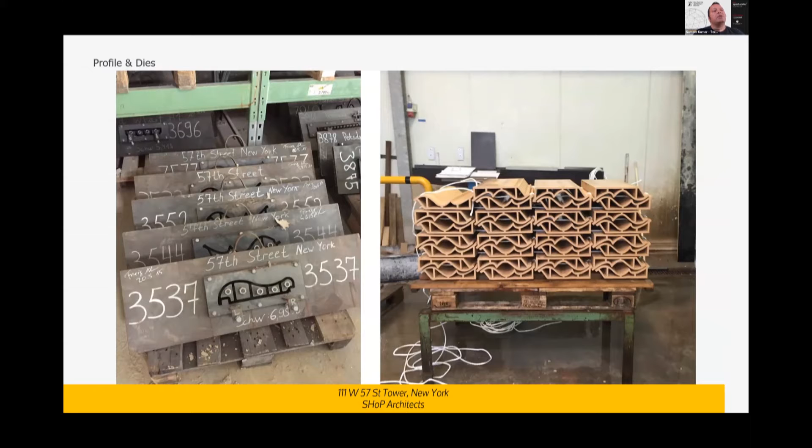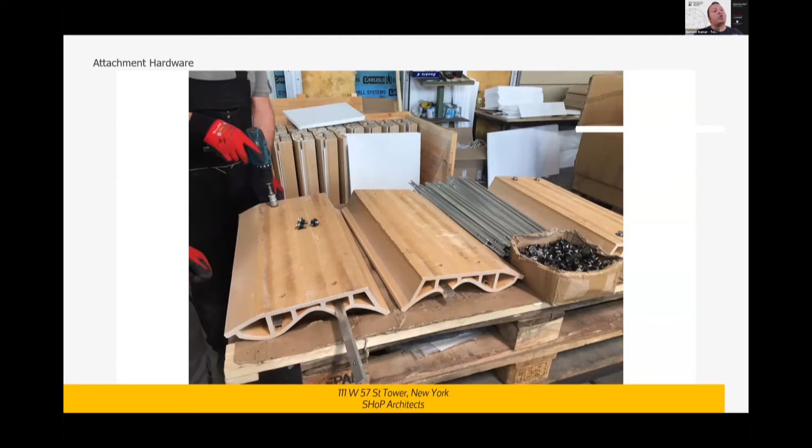So the most common way of using terracotta in architecture today is through an extrusion process. You can see the dies on one side, you can see how extrusions look on the other side. And for the 57th Street project, we took these terracotta pieces and then we incorporated other hardware within it to enable it to be mounted to aluminum facade panels.

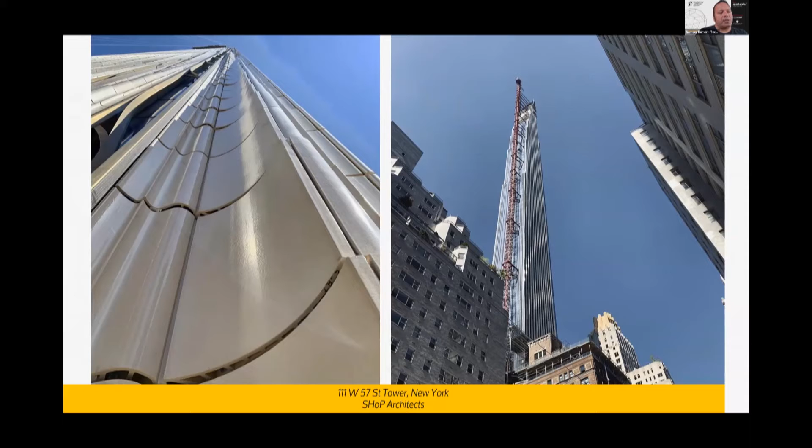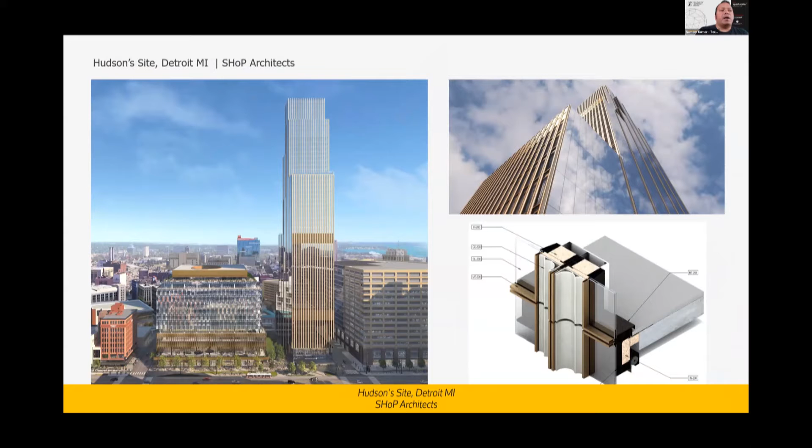And that is what basically brought us to being able to put terracotta as high up as 1,400 feet, which is the height of this tower, one of the tallest towers with terracotta on it. Similarly, the Detroit project is still under construction, so the images you see here are renderings. They also use extruded terracotta as a part of the facade.

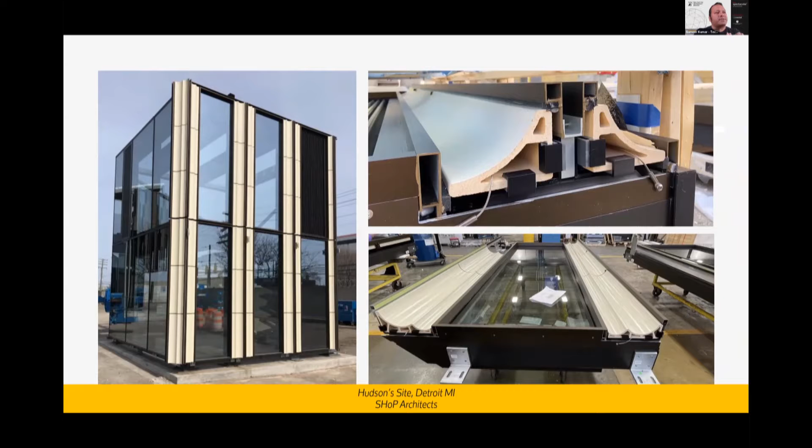And these are some images of the mock-up and some images from the fabrication shop. You can see on the upper right corner the extruded terracotta piece and the hardware that goes into holding it in place. So this is where we start, right? We as architects, as facade designers, were very familiar with terracotta as a material.

In 2017, we were invited by Fuori Salone at Milan Design Week to participate in this significant exhibition that they conduct during the design week. This was a sort of combination: SHoP invited NBK to participate because we were working a lot with terracotta and we wanted to try something interesting and new with NBK.

We offered to NBK that we would like to find a new expression of terracotta while using their existing methods of fabrication, without changing anything. We'd still like to find a new appearance of terracotta. And they got excited. Interni is the name of the company that organizes Fuori Salone.

A little bit about this event: they have a long history of inviting very prominent architectural and design practices to come and produce temporary installations, something that stands up for 2 or 3 weeks, and hundreds of thousands of people come and view it. So this is really just meant for display of your design capability or production capability. It is very much an exhibition piece.

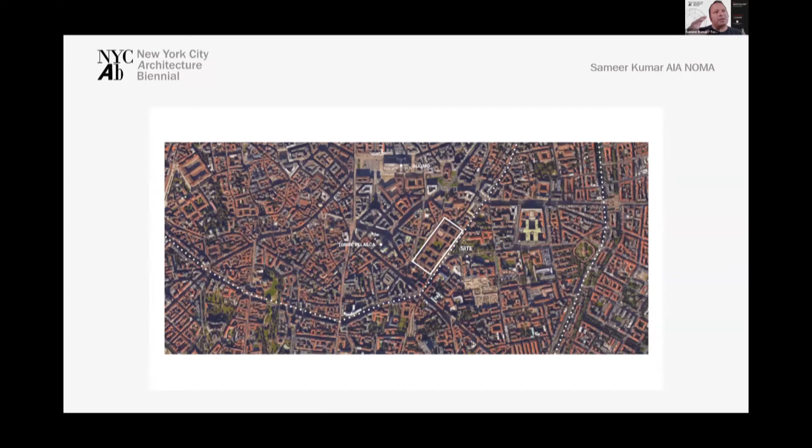And the location is right in the heart of Milan, in the State University, the Statale building. This building itself, interestingly, is extremely ornamental, all of it decorated with terracotta. And so it set up a point of departure for us. On one hand, we have this building and its gorgeous ornamentation. And on the other hand, we have this extremely modern extruded terracotta expression that we're also familiar with.

How do we bridge this gap between something that was highly ornate and archaic and something that is very industrialized and very repetitive and therefore, in a way, slightly banal? Since we were limited by the process of extruding it, our investigation started with the idea of: what do we do with an extrusion that has not yet been done before?

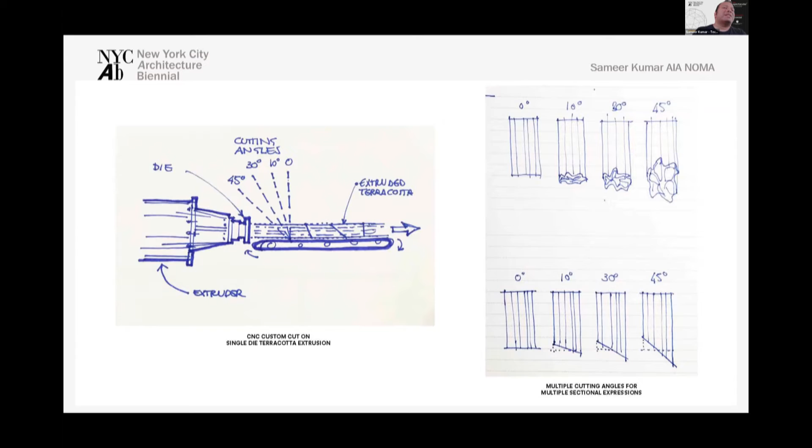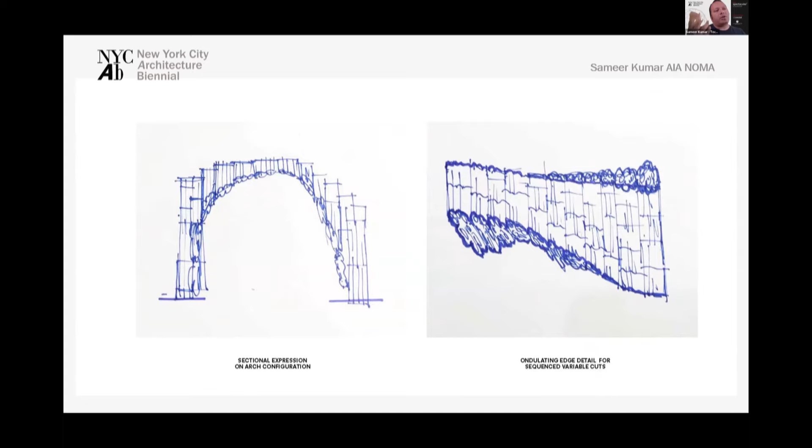One of the obvious things that we happened upon was that all extruded terracotta is used where the cross section is concealed. You see the face of the terracotta, while we decided we wanted to explore exposing the cross section of the piece. We started thinking about structures where you would be able to see underneath the terracotta and look at its cross section. And we were of course driven by ideas rooted in the history of arches and highly ornamented spaces.

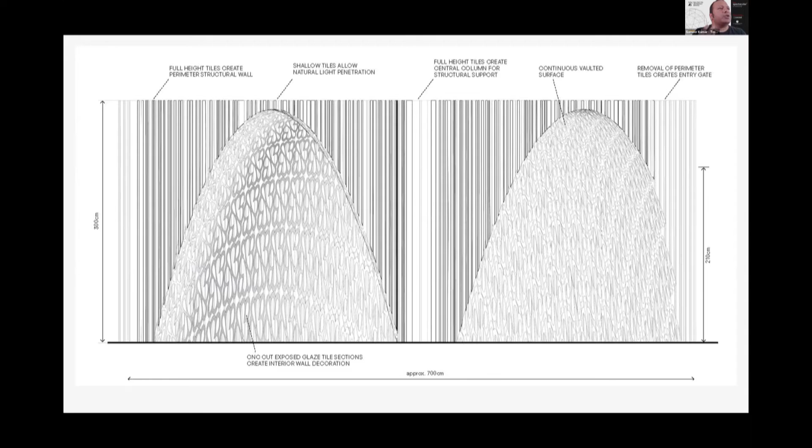And so these were our early studies, which started out as designing a cave, something that you would enter into. And then eventually, for various reasons, we ended up flipping it upside down and designing something that was actually facing upward, that you witness from the outside.

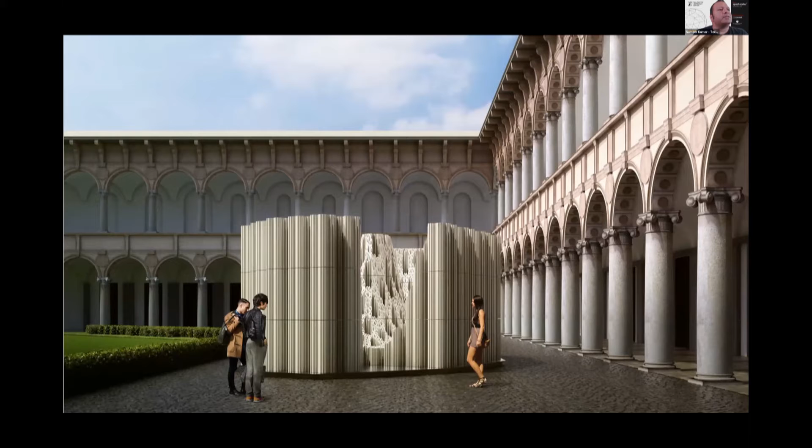Interesting, and this was our early expression rendering that we did, which internally sort of bought it based on this rendering. They were like, yeah, this looks good. NBK were excited. And we started the process of investigating how we were going to arrange this terracotta to do what we wanted it to do.

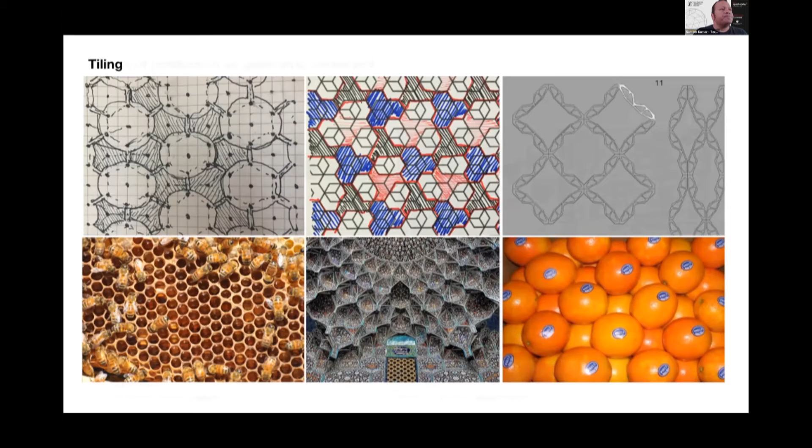And obviously, we knew that we had only one tile that we could make. It couldn't be multiple tiles, and we had to find a way of tiling it. And we were also limited by the method of production. There are two ways that industrialized production of terracotta happens. There are two ways of firing it.

One is the box kiln, which is the more sort of traditional way, which is to load up a room or a closed volume, stack material inside it, close it, and then turn on the fire, which usually is kind of time consuming because you have to put in time to stack everything, and then you close it, and then you turn it on. It takes 7 to 8 hours for it to reach the temperature. Then there's a hold time. Then you have to allow it to cool. Then you open it and you unload it.

So one of the innovations that companies like NBK have brought to architectural terracotta is that they have created these flat kilns. These are roller kilns where material enters from one side, and it's a very, very long kiln, about 700 meters or so. And the material moves through it, and it gets fired. So there is a kiln that is very long, and you constantly feed material from one side and you take it out on the other side, and it's about a 2.5 hour cycle, and the material comes out fired.

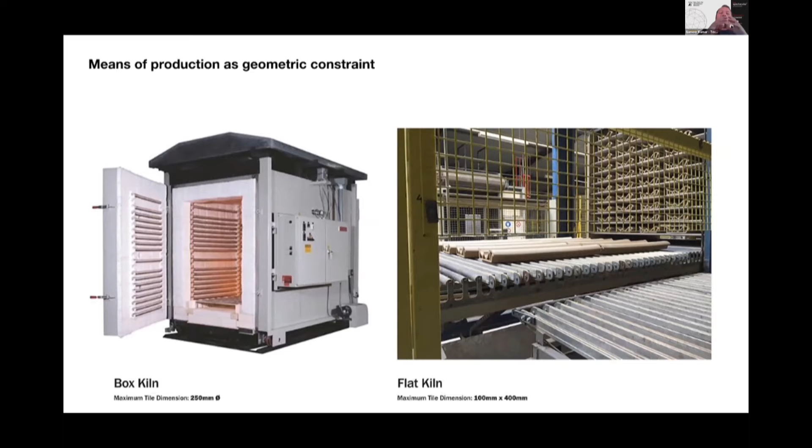So you never turn off this thing, never turn it on. It is constantly on, and you keep just feeding it with material. But there are limitations of size that come from it. And so working with that, we were given this limitation, 400 millimeters by 100.

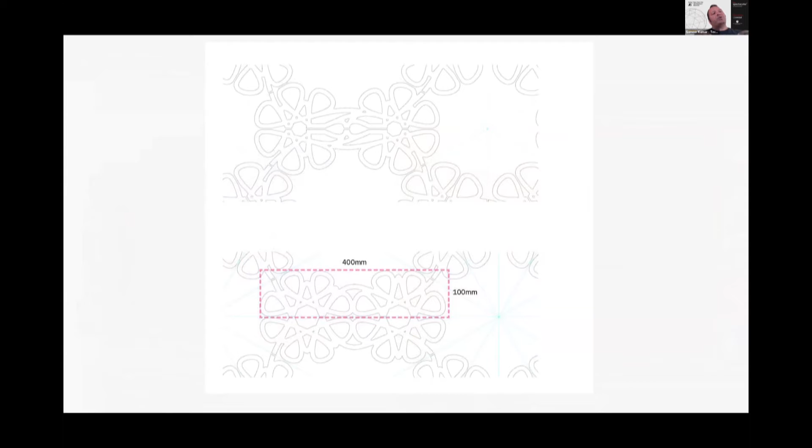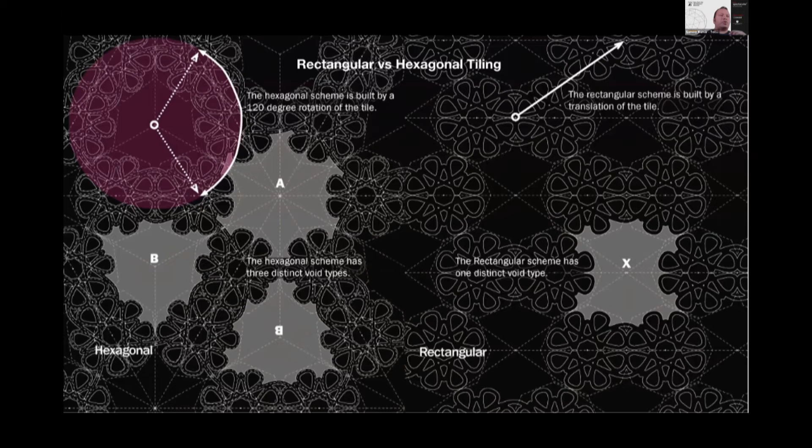So we tried to come up with a tile shape which had an interesting pattern in the cross section, which could then be tiled together to result in something that was at the same time very strong, but also very ornate. So you can see how as we were studying the tiling, we realized that we had ended up with a tile that could be combined in two different ways, a hexagonal arrangement or a rectangular arrangement, and both of them resulted in different types of visual patterns.

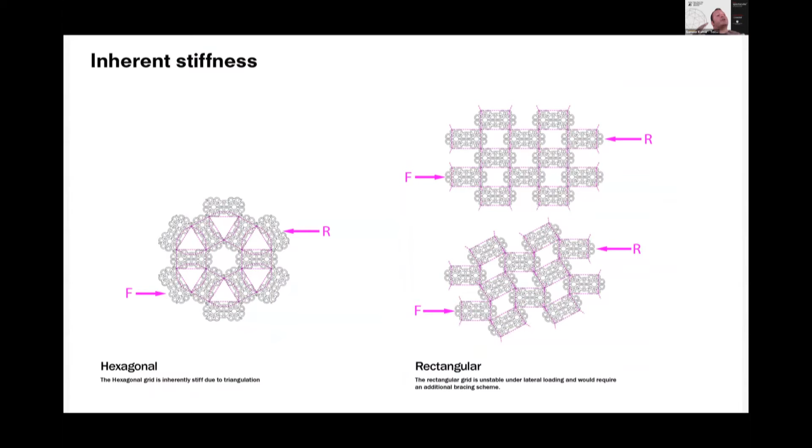And we also realized that there were some real benefits to going with one versus another. So a rectangular arrangement would give us a much finer effective resolution, but on the other hand, there was an inherent strength in hexagonal because it was made of triangles, so we chose to move away from a rectangular arrangement so that we would end up with a much stronger structure. And so the whole question of resolution, because we had to live with it for strength reasons, we decided that we were going to try and overcome this through creating a complex surface at the cut level.

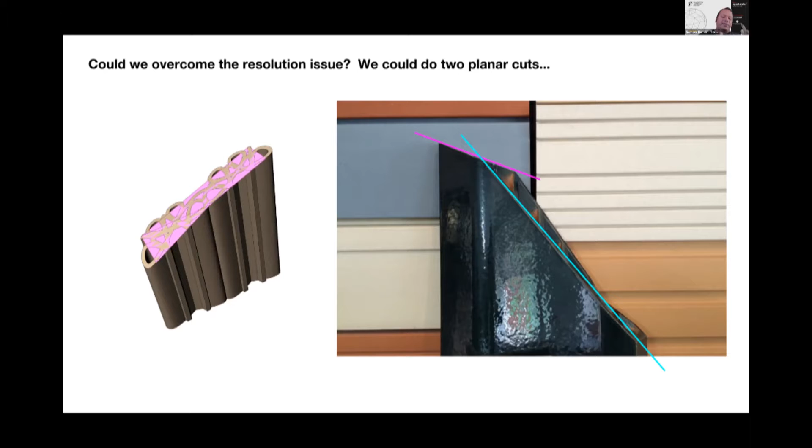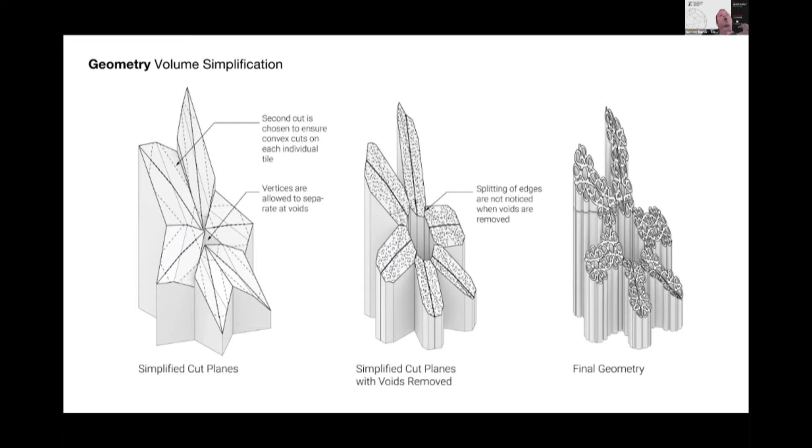So we said, what if we cut each tile 2 times to create a resulting three-dimensional surface? And all of this was happening through a three-dimensional parametric model, and we were able to overcome the question of resolution by writing this really complex script that would ensure that in the cut form, the tiles would seem that they were all matching and result in a three-dimensional geometry.

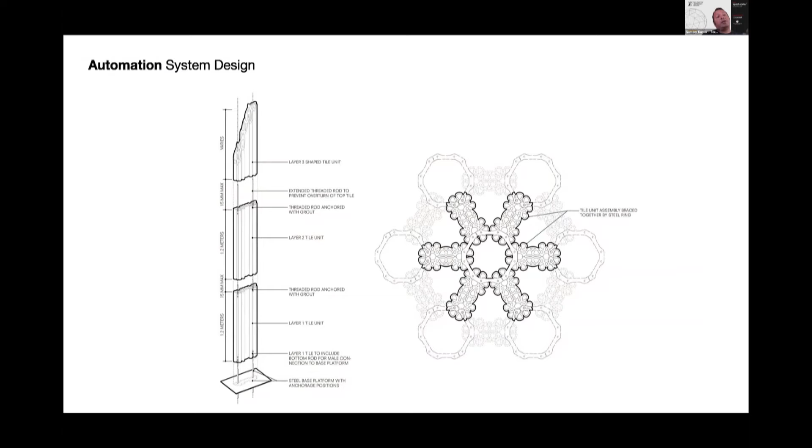And we knew that NBK basically had this one saw, which was a CNC saw, but it had very limited possibilities. It was not like a 5-axis saw; it was just a 2-axis saw. And so, working with that, we brought all of that into our model. We started developing this idea of how we're going to hold it all together. And as the design evolved, it basically started looking something like this, where we were going to have these tiles that are held together by these hoops, these stainless steel rings.

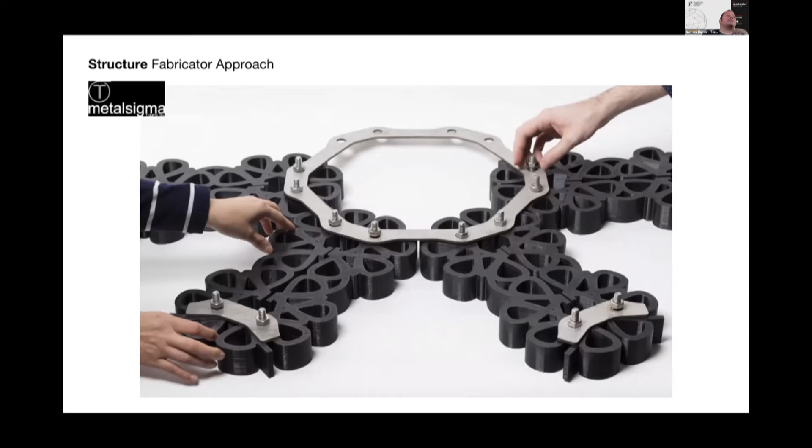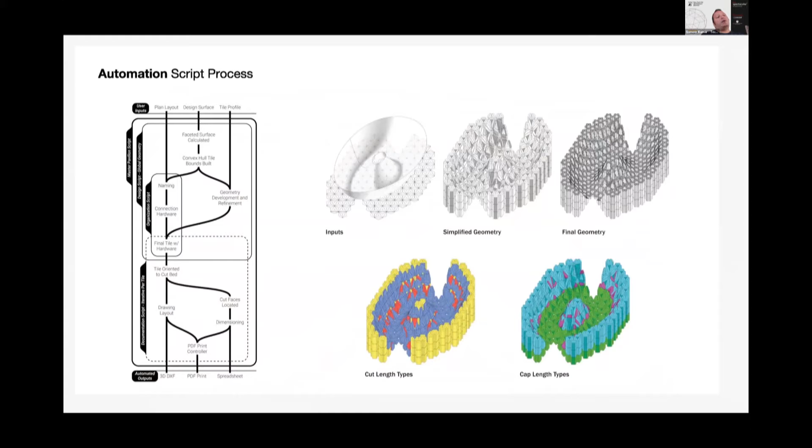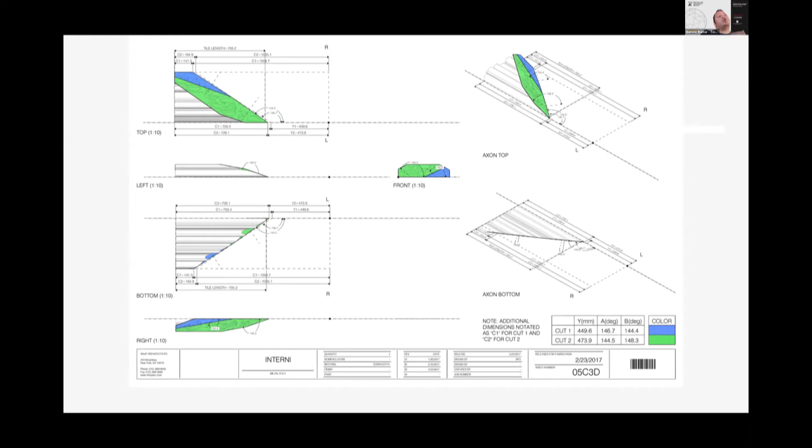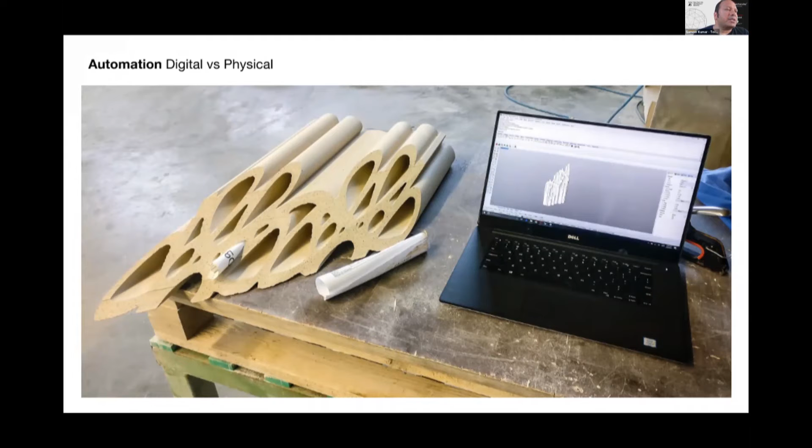These are all 3D prints and prototyping that was happening in the office at the same time. And so with all of this knowledge, we were able to feed it all into an automated script where we were able to generate fabrication drawings straight out of Rhino for NBK, for the fabricators. And we had to really understand what kind of information they needed to be able to correctly register and align these pieces. And that sort of became a critical point of interaction between the two teams, the fabrication team and the architecture team. And so they were able to actually produce all of this.

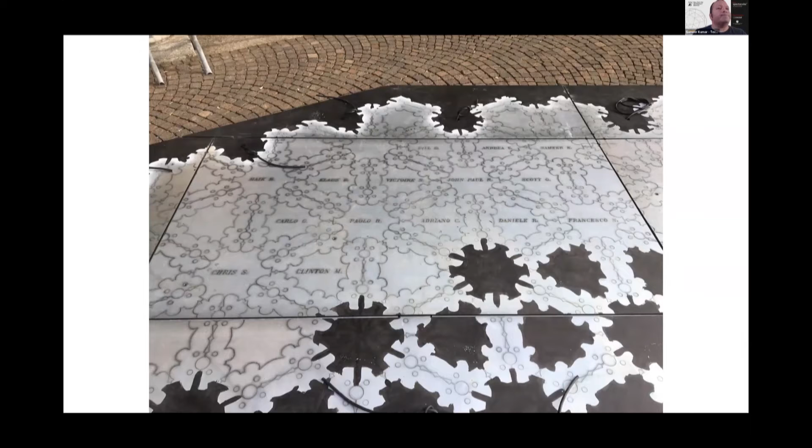On the other hand, in Milan, the installation began, and we had to create this platform where the whole thing would stand. We had to distribute the load to not damage the paving underneath. This was an extremely heavy installation. But at the same time, we also needed a way to transfer the geometry to the site. And this base became the vehicle for that. So we were able to do laser etching on the base where the whole thing will be built, and that would become the main geometric control for the entire structure.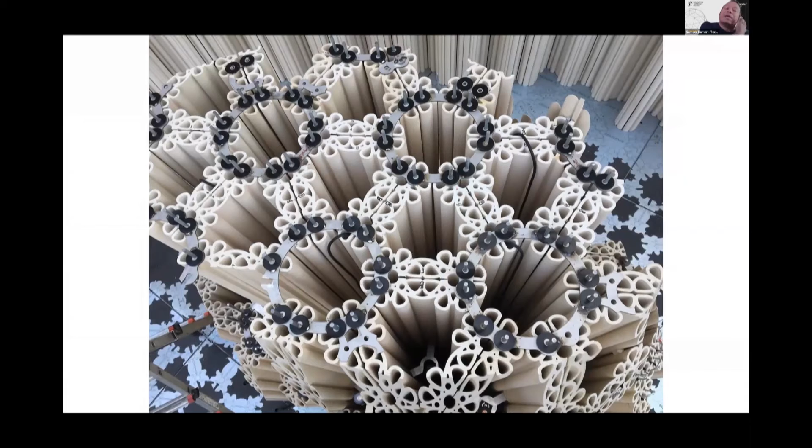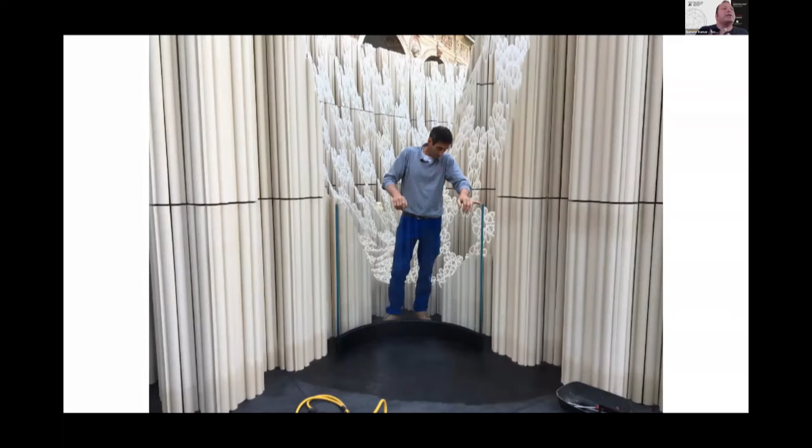And so, the pieces arrived on site with individual sort of birth certificates so that you could identify which piece went where. And then the installation started, and we had lighting that was donated by a lighting company, which was incorporated in certain parts of it. And this thing basically kept on developing. And under 2 weeks, it was fully installed with a lot of hard work. And finally, this curved glass guardrail was put in. And this was a small crew, a crew of masons, actually. These are all people who were used to working in brick, and they were doing this. And this was the resultant.

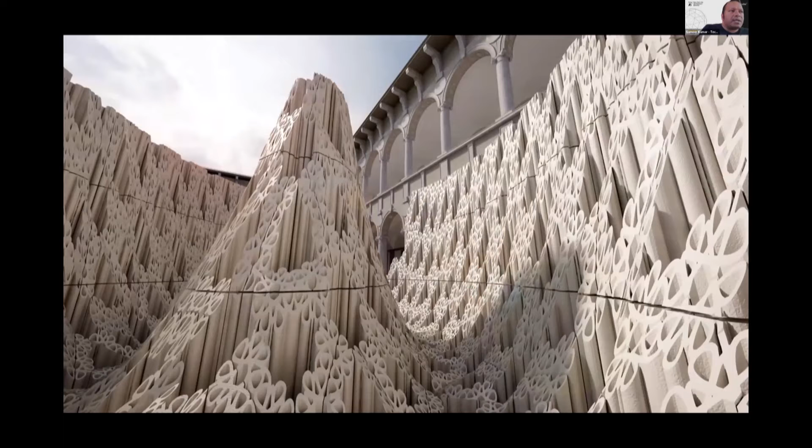And it was very well received. We thought that we were successful in showcasing terracotta, extruded terracotta specifically, in a way that was somewhat surprising and extremely pleasant to the eye. And we thought that it did a good job at finding ornament back in terracotta, even through the extrusion process.

So this was a great experience for us, because in a very, very short amount of time, the entire thing from design to construction was less than 3 months. Everyone worked under a tremendous amount of pressure. And that was one of the reasons why we started out with this upside down as a cave, but ended up with it being, because of the way these pieces were bundled together, there wasn't an inherent structural logic to them for it to be able to stand.

So the next opportunity we got to work in this research capacity was in the architectural ceramics assemblies workshop organized by Boston Valley and Buffalo University in New York. And this time we set out to produce a truly structural tile in terracotta. So, at this point, it was really important for us that we were able to solve the problem of spanning space with just terracotta and no other material.

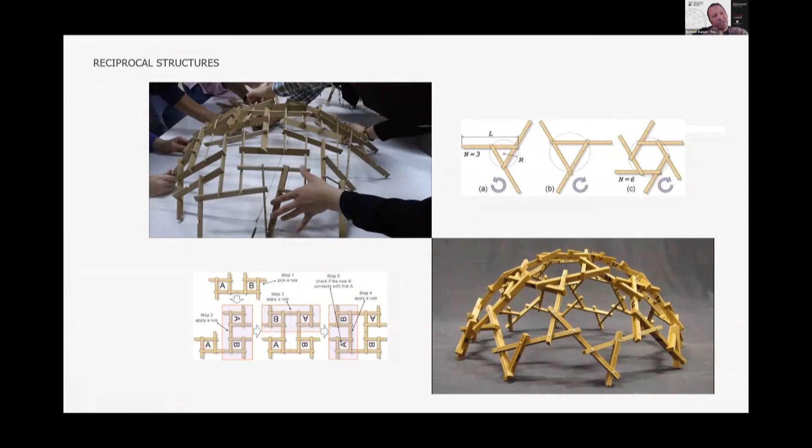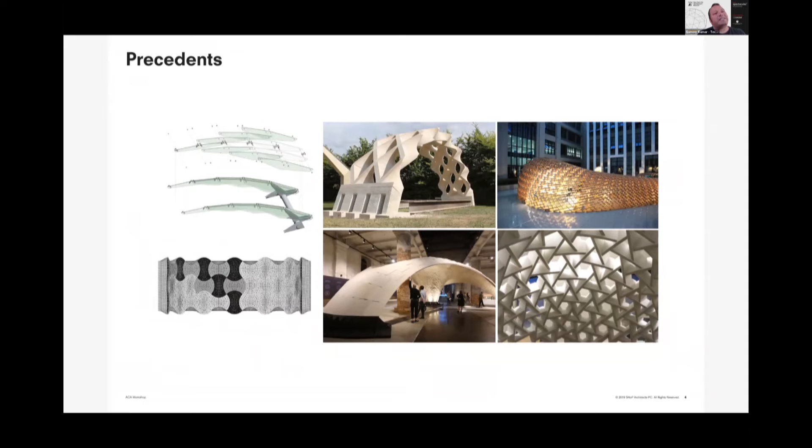So, with that in mind, we started looking at ways of using individual pieces to bridge across, to create spans. And we very quickly honed in on this idea of reciprocal beam action and reciprocal structures where you basically relied on interlocking pieces and their inherent stiffness to maintain geometry. And this is a method that has been used many times in many applications in the past, where there is a stagger in the arrangement and that stagger enables a stiffness to develop.

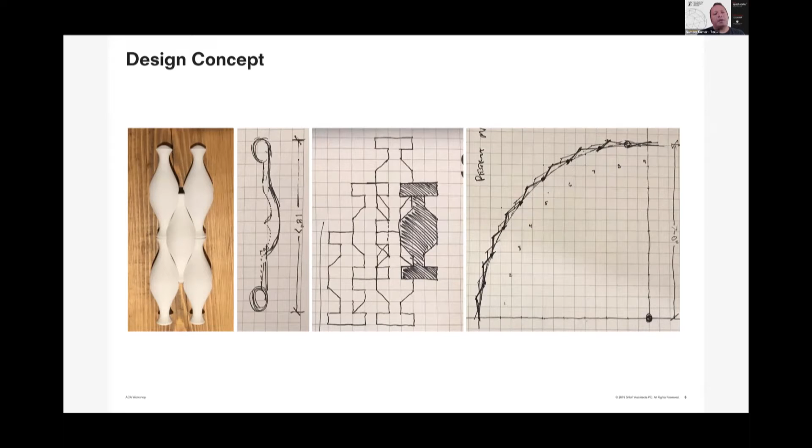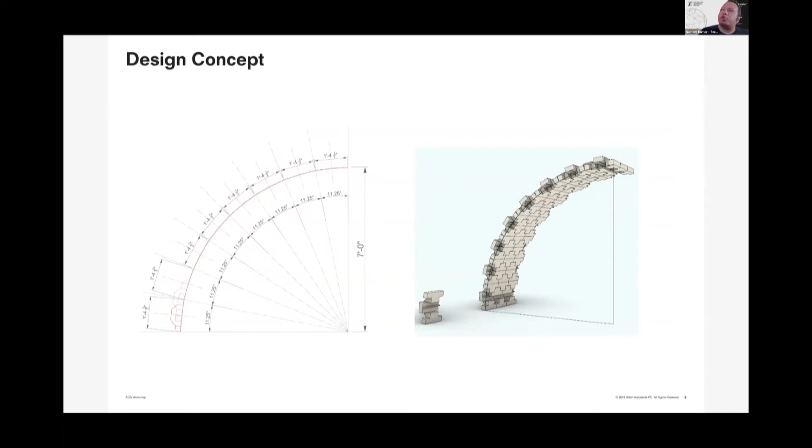So using that idea, we started developing some ideas of a repetitive tile that would be able to interlock in a staggered manner and bring a lot of structural stiffness to it. And so, these are all early studies. It was a 3-dimensional tiling exercise, but it was also an exercise in finding a shape that could be produced in terracotta, which was another whole challenge.

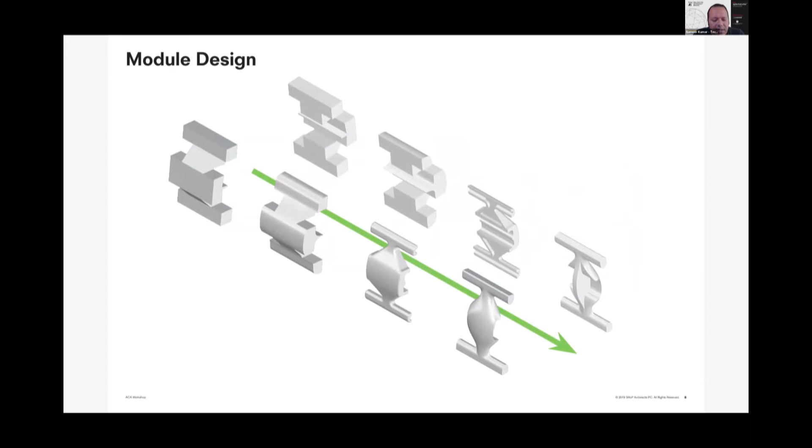So, there is the idea of the 3D tiling, and then there is the idea of a shape that is visually appealing, but also producible. And so that was the journey of coming to a shape that fulfills all of these ideas. And we started taking this forward. We 3D printed a lot of these shapes in-house, and then we started tiling them together.

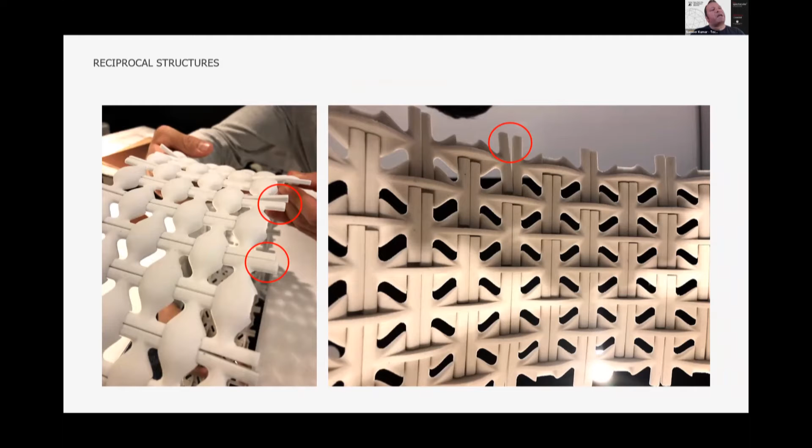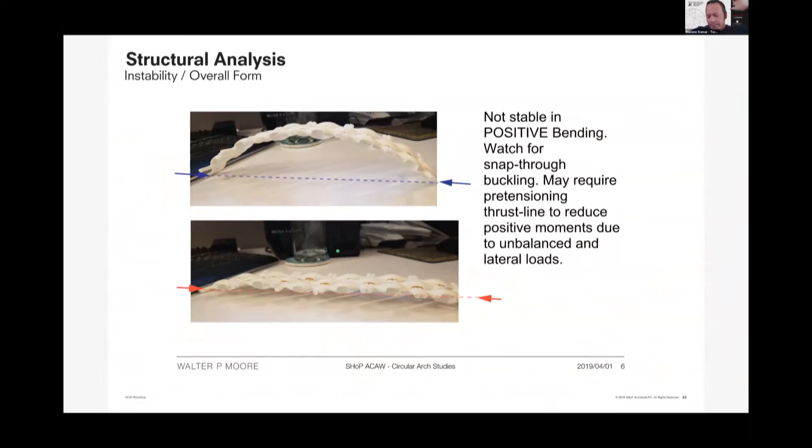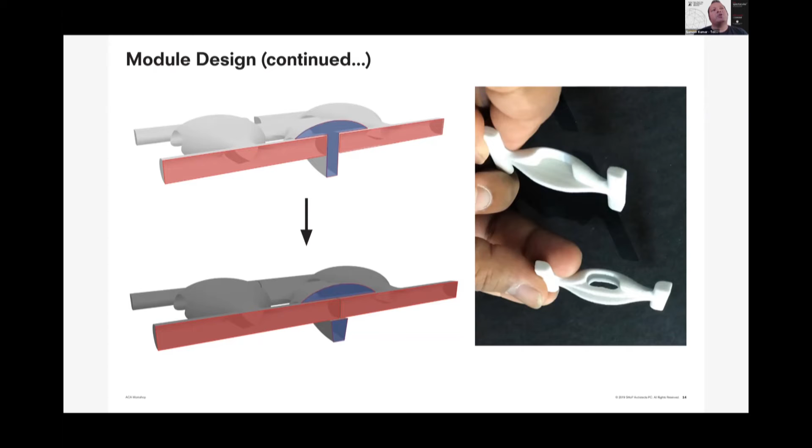And as we did some of the studies, we realized that some things were not working out. Something was wrong, that at the edges, these terracotta tiles were flaring out. And we understood that basically the problem was that the way we had shaped the tile, so that it was easily pressable, we were trying to ram press the tile, wasn't adequate, and that we had to change the tiles so that instead of just having an indent on the underside, it would actually have a hole. And that hole was a little difficult to do in a ram press, which is how we were looking at this tile to be made.

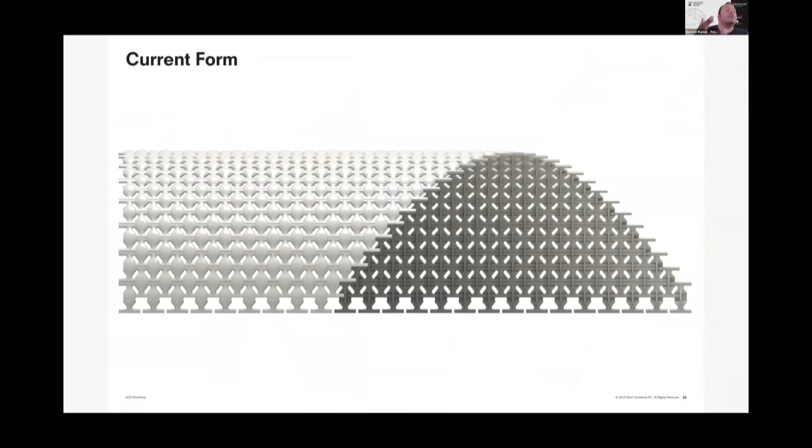But once we changed that design of the tile, we knew that suddenly we had solved the problem, and it was extremely strong and really working well together as a tile. And so this is the vision that developed for an overall arch or a vault. And then we are also looking at glazes and gradient glazes, etc. So you'll see some of this at the end.

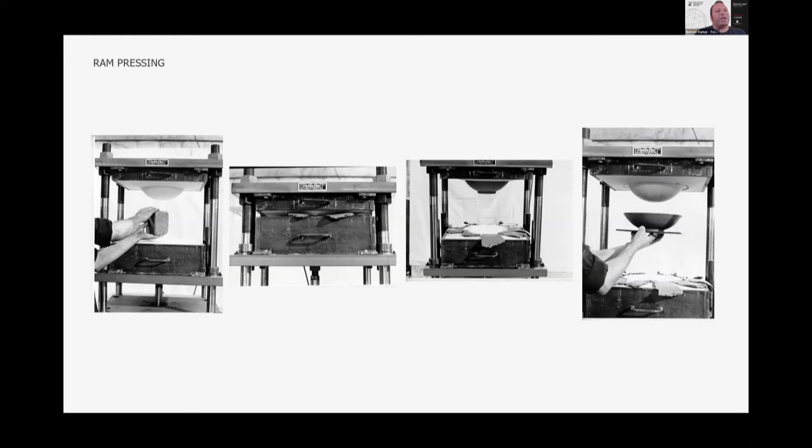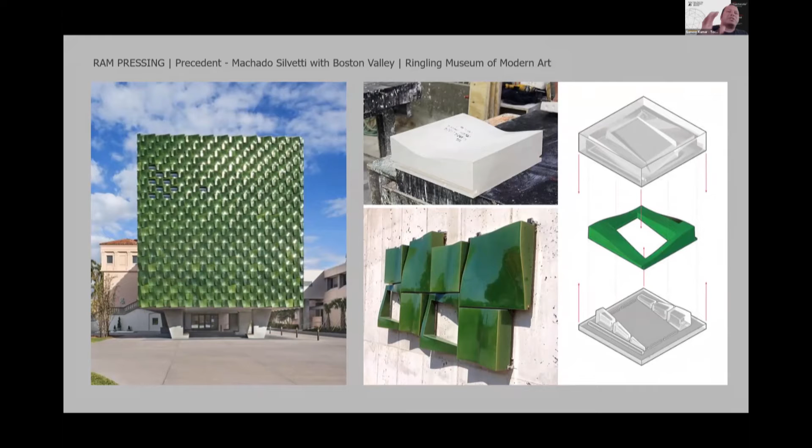So this was the method of production that we originally started out imagining. And this is a very, very old method of production. You basically have a negative and a positive mold. You put terracotta in between, you press it down, and you pull it back up, and you have shaped the material. And this method has been used in architecture. This is the Ringling Museum by, I think, Boston Valley and Machado Silvetti, in Florida, which used such a method to make these 3-dimensional tiles. So we knew what such methods could do, and we were working with that.

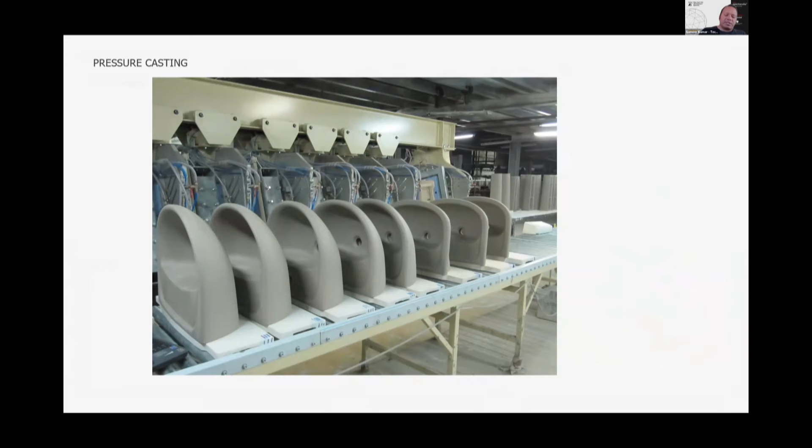But once we had to change the shape of the tile to have that hole underneath, we had to reimagine the method of production. And interestingly, Boston Valley decided to bring into the picture something called pressure casting, which is a method that is commonly used in the world of sanitary ware. All the ceramic sanitary fixtures are cast in this manner, but in architecture, it is relatively unusual to cast materials like this. But that became the method that Boston Valley could do. Interestingly, they could do it in-house. They hadn't done a lot of it, but we started then working with them with that method in mind.

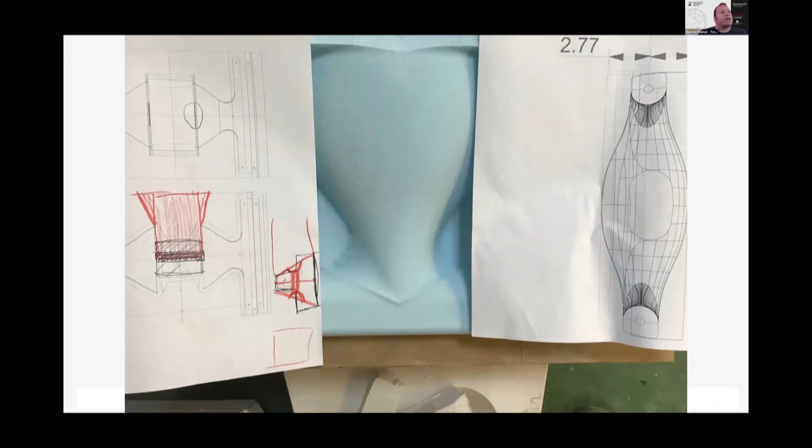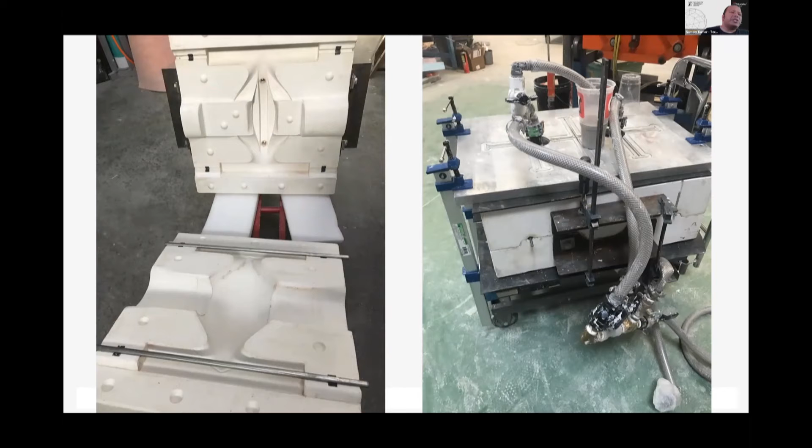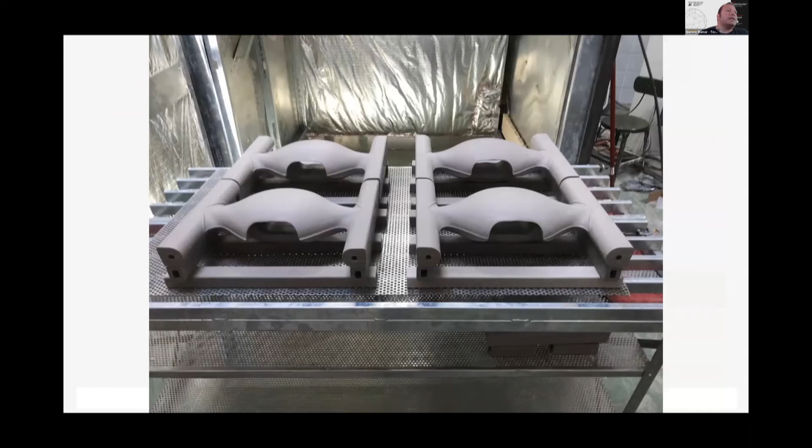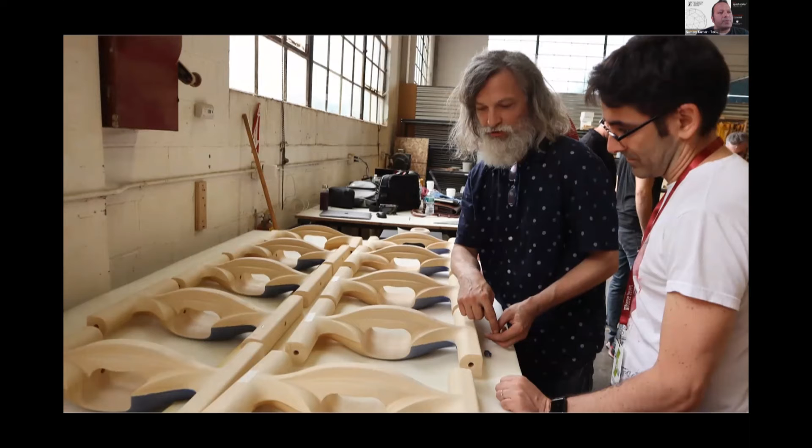And this is a fresh green piece out of the mold, which is then taped up, masked for glaze application, and then fired in a box kiln, resulting in a tile that looks like that. And it was an extremely beautiful piece of terracotta, very heavy, but it was a fulfillment of a lot of hard work that we had done over maybe 5 months. And so we had these little bits of silicone tape that we were putting on to prevent any damage. And then it was ready to be interlocked and assembled.

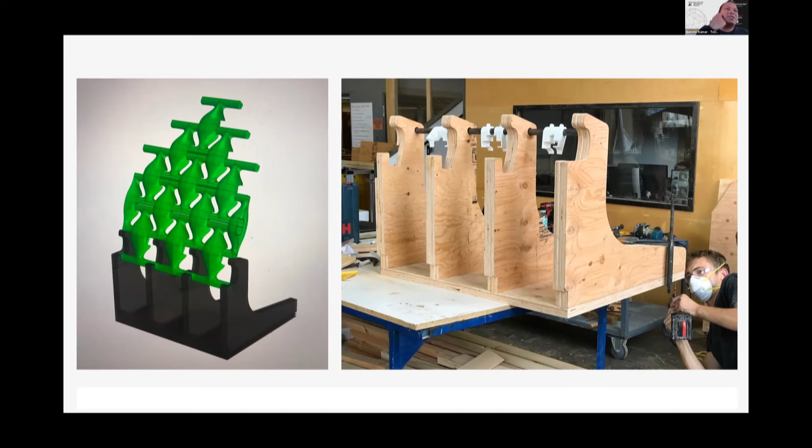So we had also designed this. Boston Valley, through this program, would allow us a limited amount of pieces. So we couldn't do the whole arch. We just did a small piece. So because we couldn't complete the semicircle, this was going to be a cantilevered piece. So we had to come up with a hefty base design that would provide the reaction to create a cantilever with such heavy tiles. And so this is the base that we designed, which had pretty interesting, complex 3D printed components to it, as well as laser cut plywood components and steel rod and all of that.

And that opened up the process of starting to interlock it. And it was amazing how well each of these tiles slid into each other. And we were able to achieve basically exactly what we had set out to achieve. So this is the final look of it. This is a 3D printed model of the whole thing if we were to get to build it.

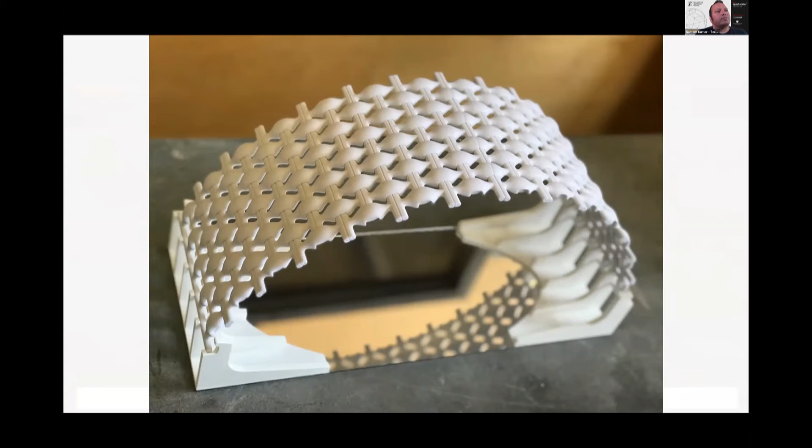And someday maybe we do it in terracotta, but right now I am interested in exploring this concept in stone, exploring this concept in cast glass, and trying to find how the shape of the tile changes as you change material, when you change methods of fabrication, and you change the weight of the material and its properties. So that's really interesting.

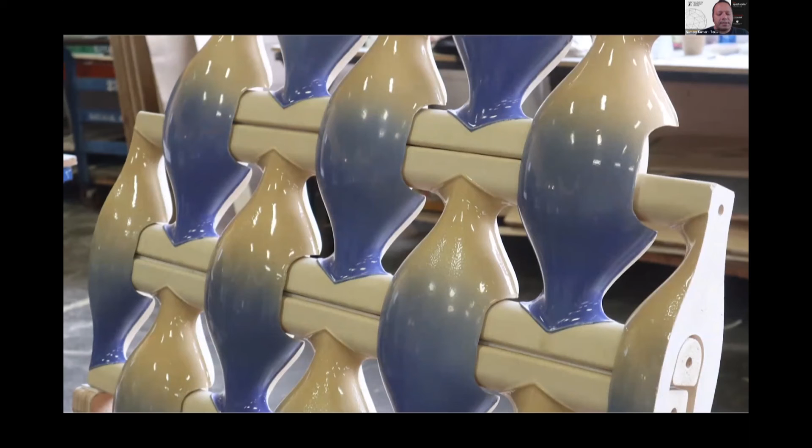So, first of all, I'm so glad to bring you here to the table to show the work that you do. It is so specific, and it would be great if you're able to help so many architects that are trying to achieve unique structures, and you are specializing in facades in a way that is so unique.

I've seen other facade consultants that are bringing to the table just whatever is done in the field or in the market, and you just need to choose from something already done, versus this that is completely experimental, and given your experience something new could be completed in a fast way, because you already have the experience with the materials, with the technology, with the availability.

And when we have to look at facades of buildings, we need to see timings too. So you're aware of what is available, how long it would take to be produced, and all those aspects that are essential at the time that you're doing design development. Absolutely, you need to know what material you're going to use on your facade, and you usually have a schedule for when the project needs to be completed. So having someone with your experience is fantastic.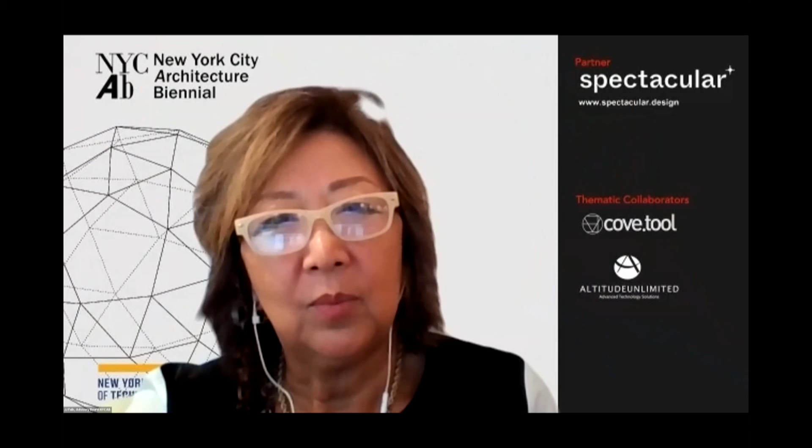Yeah, I would just like to say one thing at the very end. We are talking about the material practice of architecture, the practice of architecture that deals with the materialization of ideas. And I want to say that the challenges that we face today, especially the climate crisis, the immediate surroundings, even the challenges coming from the pandemic and the supply chain, all of these challenges are directly related to the material practice of architecture. So while we all acknowledge that there are many determinants of architecture, including economic, political and emotional forces, it is the material practice of architecture that must find answers to our immediate challenges.

And we as architects will only find success dealing with climate change and carbon by engaging with materials, by engaging with supply chains, by engaging with the process of fabrication. And I think that the time is high for all of us architects to embrace that the material practice of architecture is really important to our practice if we want to save our planet, if we want to solve the problems that are ahead of us.